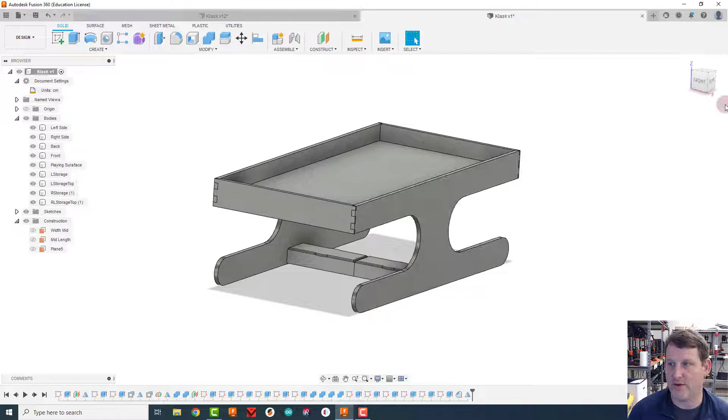We'll just glue these middle two pieces together, but we need to put screws in from the wood. So to do that, we're going to create holes on the outside. We're going to create a sketch on the outside face of one of our legs, doesn't matter which one.

But I need to know where the storage box is. So I'm going to hide the right and left side, and this is the storage box that I'm going to put the screw into. I'm going to use P for project, and I want to project this face onto my outside sketch.

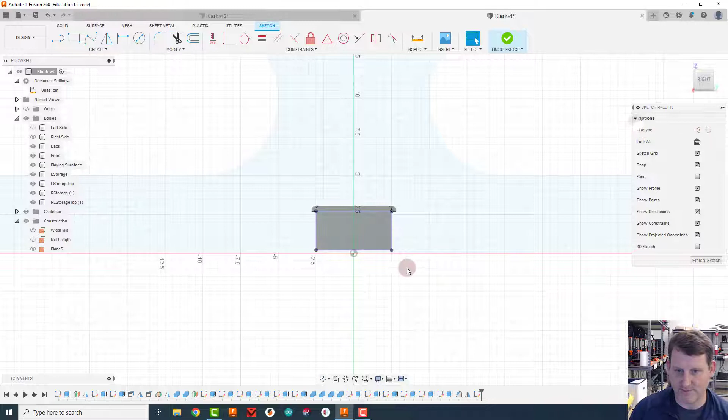Now I'm going to hide the storage boxes real quick, left storage and right storage. In fact, I'm going to be doing that a lot, so here's something I'm going to do. I'm going to right click on my bodies folder and create a new group.

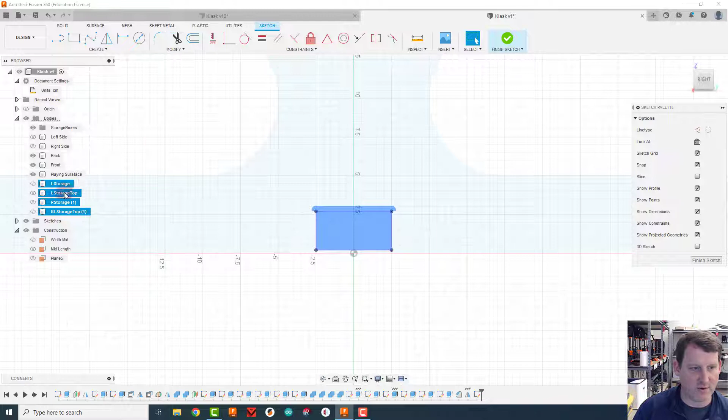I'll click on that group and type in 'storage boxes', enter. Then I'm going to take my left storage, hold down the shift or control key, and click on all of the storage box stuff, left storage, right storage, drag those and drop them in that folder.

Now I'm going to open that folder with this little arrow, turn them all back on, close the arrow back down, collapse the folder, and now I can turn them all off with just one click. That's going to make my life a little easier.

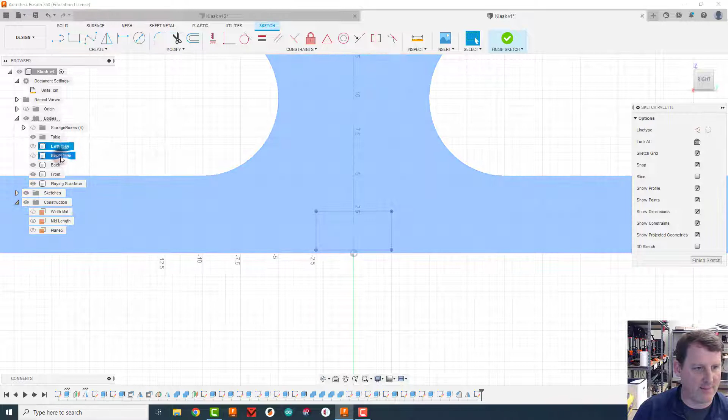Maybe I'll clean up one more thing too. I'm going to right click here, do another new group, and say 'table'. That's where I'm going to put my left side, right side, back and front, and the playing surface. All of that goes inside there.

Open it back up, I can turn them all on, close it up, and turn them off with one click, just like that. I'm going to actually open the table one back up so I can see them all.

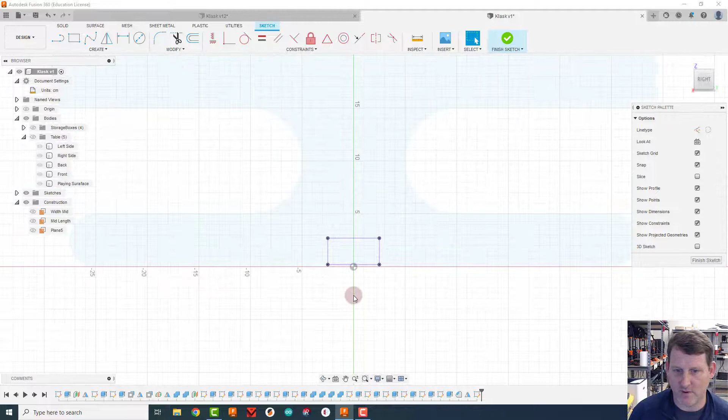So now that is where my box is. I'm going to put two screws in it. So I'm going to take a construction line to line things up, going from the middle of this one across to the middle of that one.

I'm going to come in here, grab a circle, turn my construction line off. I'll click somewhere on this line, doesn't matter where, just don't be at the midpoint, be off to the side somewhere, and draw a circle.

Now how big is that circle? We're going to be using these tiny little black screws to go into it. So with my calipers—let me find my calipers—I'm going to measure the size of the screw's head.

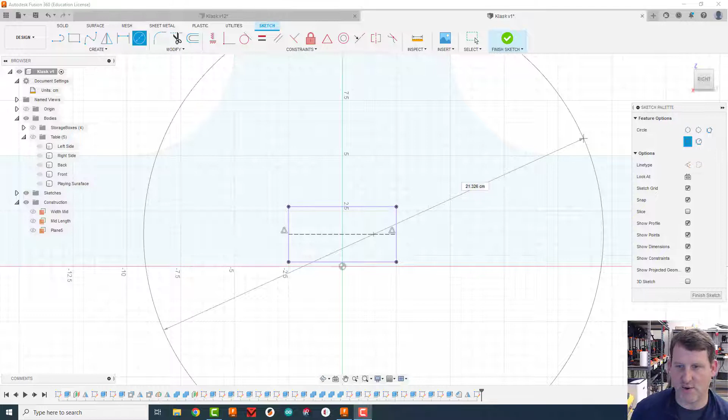I find out it's about 8 millimeters. So I think I'm going to go a little bit bigger than that, maybe 9 millimeters, so 0.9 centimeters for this hole here. I'm going to click and do 0.9.

Uh-oh, escape, let me do it over. Oh, I can't do it. All right, so I didn't set the 0.9 on this, but it's easy to fix.

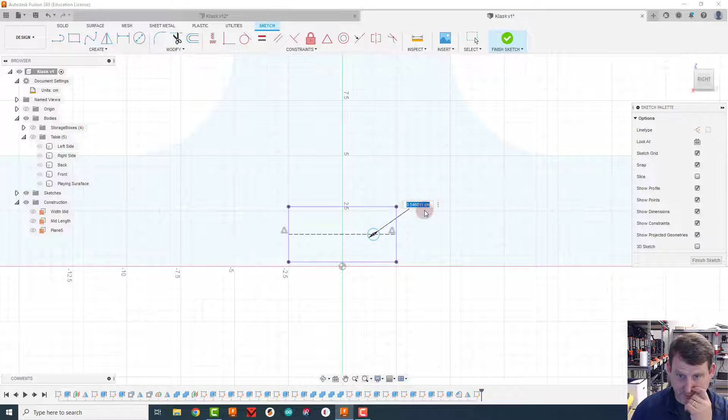I'm going to use D for the dimensioning tool, click on it, and do 0.9, enter. Whoops, 0.9, enter, there we go. I'm going to do another one here and do 0.9 as well. Again, I haven't placed these yet.

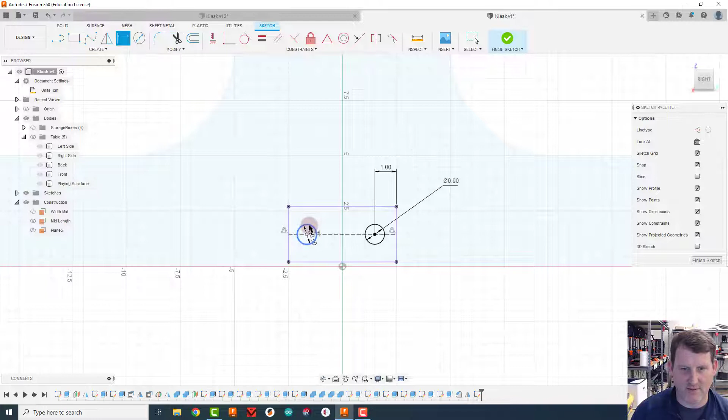Now to get these the right distance, I'm going to space them from the outside edge. So I'll do D for dimensioning, click on the circle, the outside edge here, place the measurement, and I think 1 centimeter looks pretty good. Over here I'll do the same thing to this outside edge, 1 centimeter, enter.

So those are going to be the holes for the head. Now I'm going to turn on the right side again. Whoops.

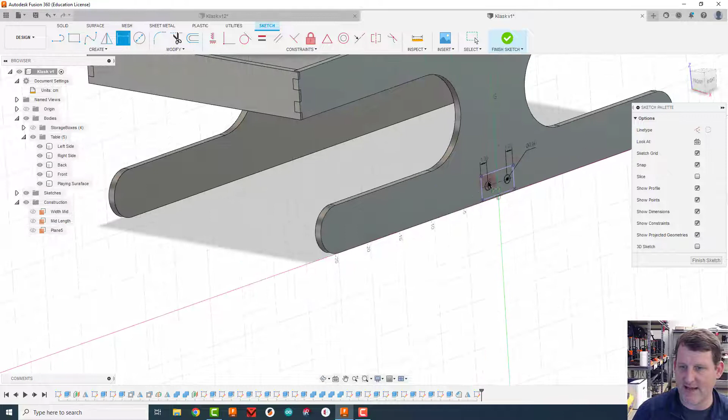Turn those back on, and now I'm going to zoom out so I can extrude in. I'm going to press E for extrude, and I just want to cut one layer of plywood in, so the head can sit below the surface. I'll do a negative since out is positive, and TH for thickness, enter, enter.

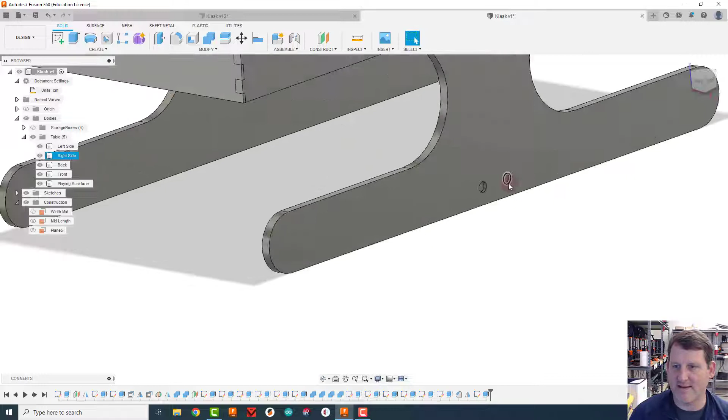Now I've got a nice hole for those screws to sit inside of. Now I need to punch another hole for the screw to actually go through, and I want the screw to not hit the wood at all. So I'm going to measure the width of my screw like this. That's 2.88 millimeters, but I want it to not touch the wood, so I'll go up to 3.

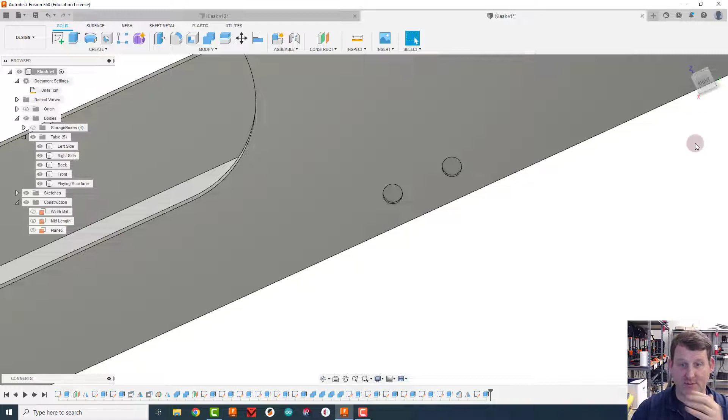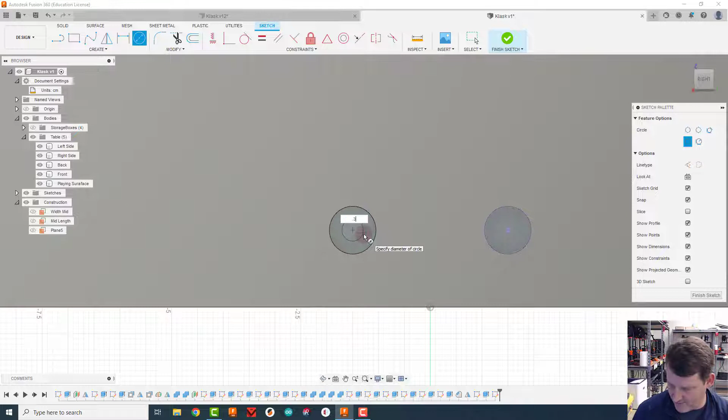So I'm going to do another sketch on the bottom of this hole, right inside there, and project this circle onto there as well. P for project, click on this circle, click OK. Now I'm going to draw a smaller 3 millimeter circle. See where it says O? That means I'm in the middle of the overall circle. Click there and come out to 0.3, click enter. Another circle - you can use the letter C for circle too. Again to the middle and then to 0.3, enter.

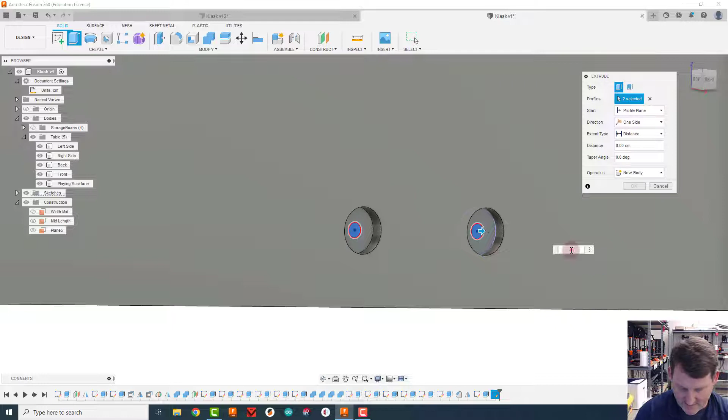This one I'm going to extrude, and this time negative because I want to go the other way. Thickness, but I want all the way through, so times 2, it's 3 layers. Enter. Now when I look through here, I'm looking right through it - I punched a hole through.

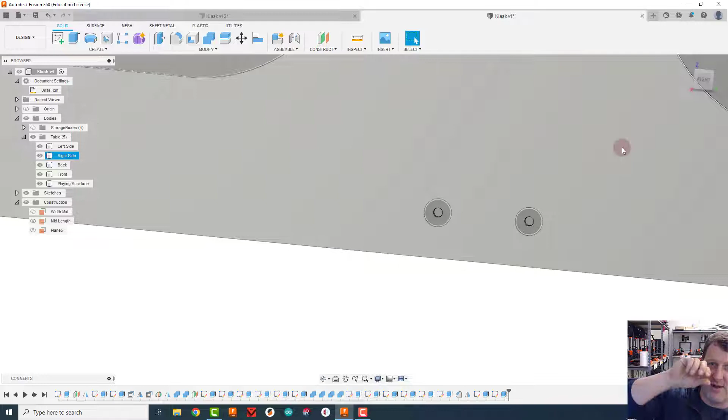So that's where the screws go through. Now I need to cut some holes in the plastic. I don't want to put the screw directly into the plastic, it'll cause problems and break it. I want to put some holes in there, but they need to be smaller than the width of the screw threads, which is like 2.8. So I'll make those about 2 millimeters.

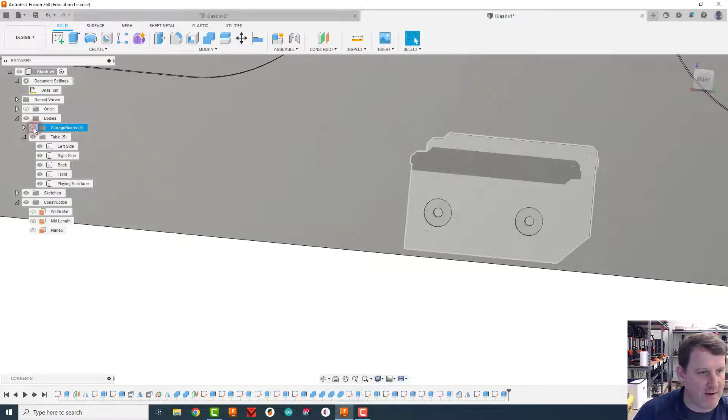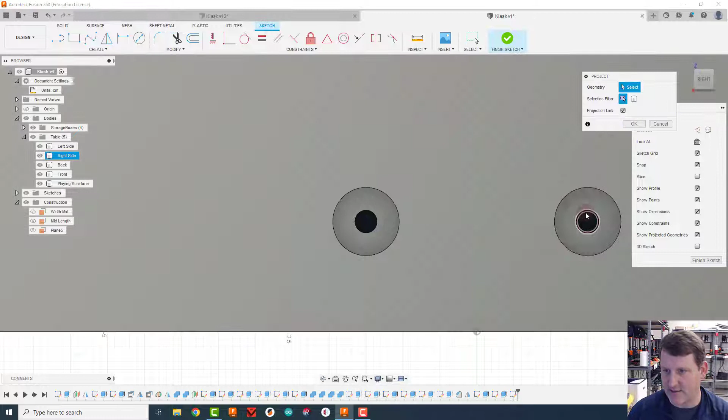So I want to turn back on my storage boxes, and create a sketch at the bottom of this hole. This is actually the face of the storage box - you can see the rectangle it makes. I'm going to create a sketch on that. I need to know where these holes are, so I'll do P for project, and project that circle and that circle. Click OK.

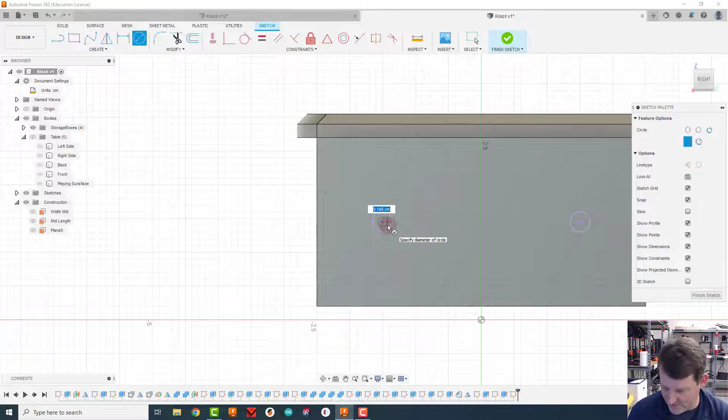Now I'm going to hide all the table pieces by clicking on the table folder. This is just the storage box now. I want to extrude, but first draw those smaller circles on the inside - that's the big circle in the wood, this is the smaller circle, it's going to be 0.2. Enter. Then C for circle over here, and 0.2, enter.

Extrude, and extrude. Maybe I'll hide the lid - so I'm going to come up to my storage boxes and hide the two tops. Top and top are hidden.

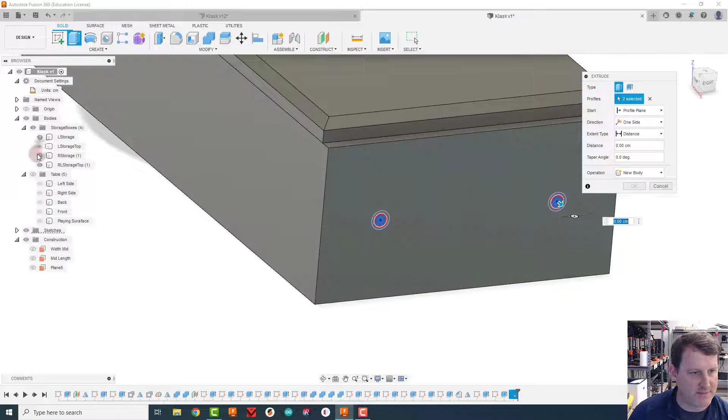And then I'm going to extend this back in here, a pretty good distance, but I don't want to go all the way through this outside edge - I'm looking at the top view right now. I just want to go maybe 1.2 centimeters in, that'll be plenty enough to let the screw get all the way in there.

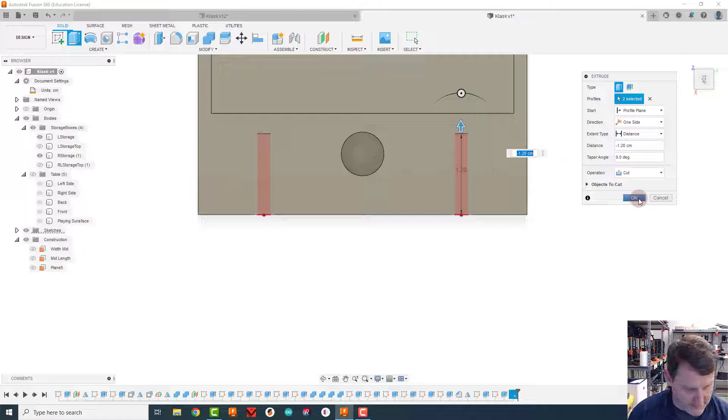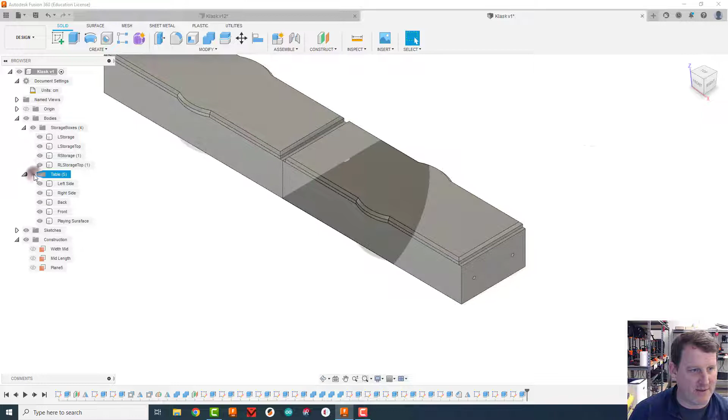Boom. So now I've got these tiny holes that are a little bit smaller than the screw thread, so as it goes in, the threads will cut into the plastic nicely without causing any breaking or cracking. All right, we have holes there for the screws. I'm going to turn these back on, and turn all of those back on, and we have holes for the screw on the outside.